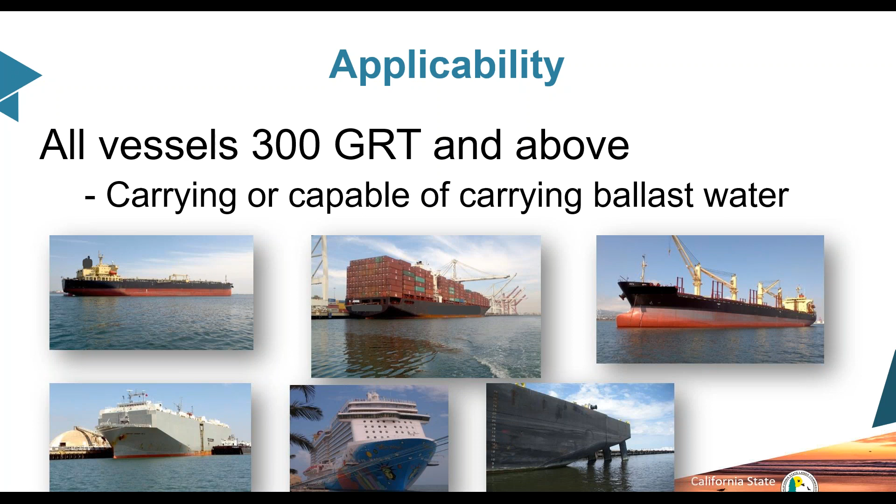So I'll quickly spend just this one slide talking about the main components of the regulations. There's another webinar that we produced about a year ago that goes into more depth for each of these different components, and I'll link to that in a few slides. So if you have any questions or you're unsure about some of the requirements, I'd encourage you to go back to that webinar and review that. And then, of course, please feel free to ask us any questions.

So the main components here are a requirement for a vessel to have a biofouling management plan and a biofouling record book. The biofouling management plan is supposed to be the vessel's management strategy for how they will manage biofouling. The record book is meant to document the implementation of that strategy. And these requirements were important for us because they provided a lot of international consistency. These are major components of the International Maritime Organization's biofouling guidelines that were released in 2011. And they are one of the ways to achieve compliance with New Zealand's craft risk management standard.

There's another component that requires submission of an annual vessel reporting form. This form is to be submitted once per calendar year and at least 24 hours prior to a vessel's first visit to a California port of that calendar year. There are requirements for biofouling management for different wetted surfaces of the vessel, and so there's a requirement for management of the hull and a requirement for management of specific niche areas.

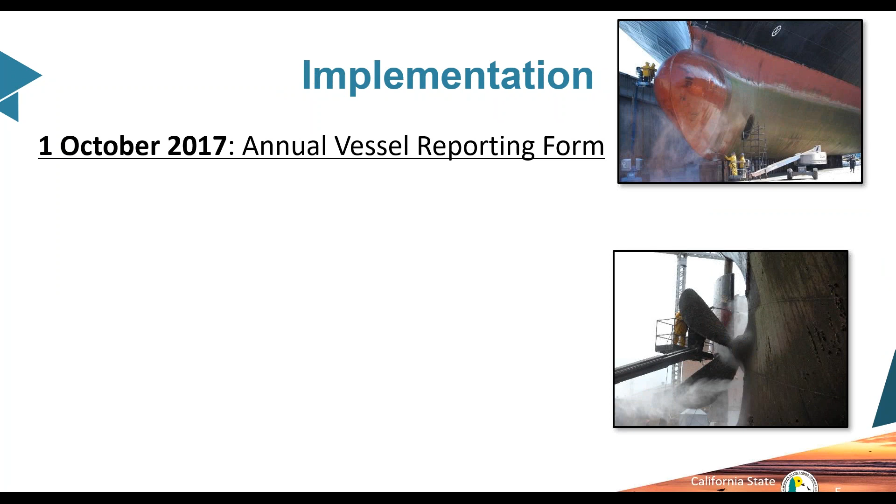So implementation, as I said, the rule went into effect on October 1st, 2017. And at that point, only the submission of the annual vessel reporting form was required. The remainder of the regulations became effective on January 1st of 2018. And they didn't all kick in at the same time. So we phased in the implementation based on a vessel's dry docking schedule.

So an individual vessel is not subject to the remainder of these rules until the completion of their first out-of-water maintenance or dry dock or delivery as a new vessel on or after January 1st of 2018. And we often get the question about why we're phasing it in this way. Basically, effective biofouling management is dependent on a strong biofouling management plan and preventive activities that are best implemented when the vessel goes into dry dock.

I'm not sure why that happened.

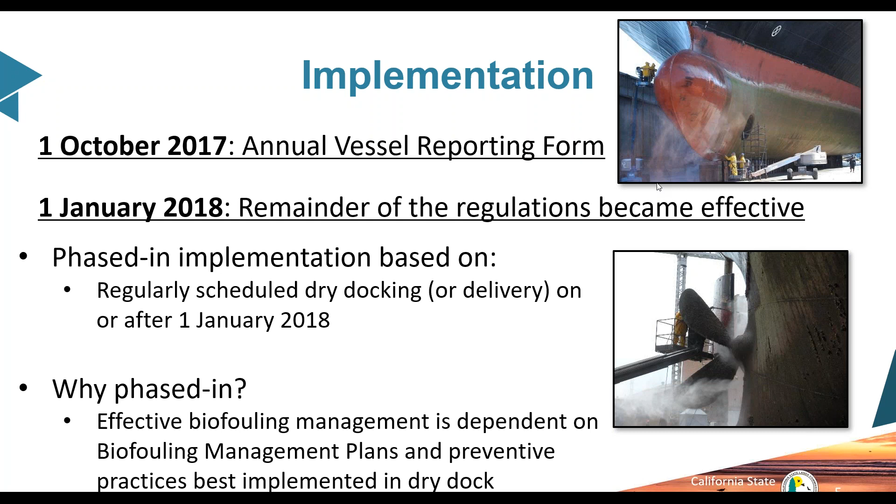And so we thought it was necessary to tie the dry docking schedule into these regulations. So because this was a new set of regulations and regulating biofouling in general was new on the world scene, we knew that there would be a lot of outreach that needed to be done to make sure that everyone was aware of what the requirements were. And so we took a few different strategies of getting information out there.

We developed a guidance document, and the link is right there on the slide here, and the PowerPoint will be posted to our website as well, so you can click on that and get the information. But that guidance document up in the top right corner had a summary of the requirements in the regulations, a section that had frequently asked questions and answers, and an example biofouling management plan to show the industry some of the things that we would be looking for when we conduct inspections.

As I mentioned, we held another webinar about a year ago, in September of 2017. The link is there, and it's also posted on our website. And in this webinar, we describe in more detail the main components of the regulation. And we also held several customer service meetings, one in Southern California and one in Northern California, where we again described the different management requirements within these regulations. And the target there were shipping agents in the Northern and Southern California areas, because the shipping agents are one of the primary conduits of information between us and the industry.

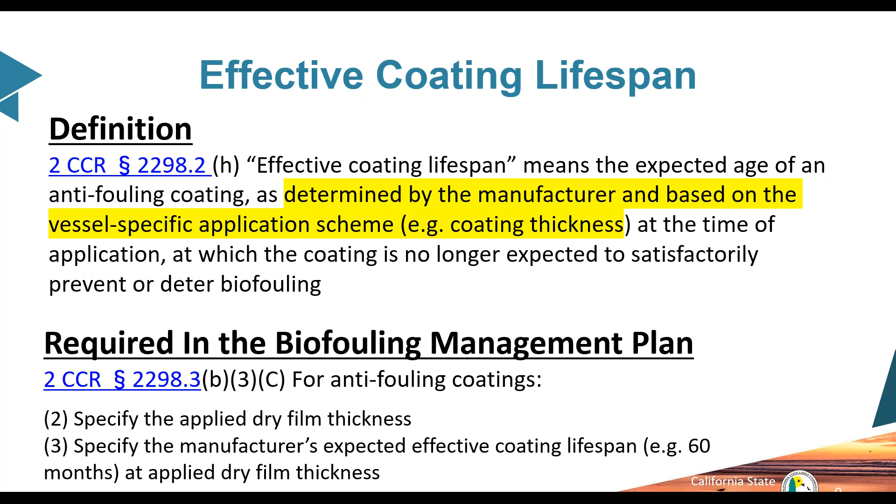The requirement here is within the biofouling management plan, the description of the anti-fouling coating has to specify the applied dry film thickness and specify the manufacturer's expected effective coating lifespan, e.g. 60 months, at the applied dry film thickness. So we're asking them to document the effective coating lifespan of the coating that they're using on that specific vessel.

So the next few slides, we'll go through some examples of some of the useful documents that we've seen through our inspections, and some examples of some incorrect documents that don't specify the information that we need to see. A few examples of these are IMO AFS certificates. These are certificates that are usually distributed by classification societies or flag states, identifying that the vessel is compliant with the IMO convention to prevent the use of harmful anti-fouling coating biocides like tributyltin.

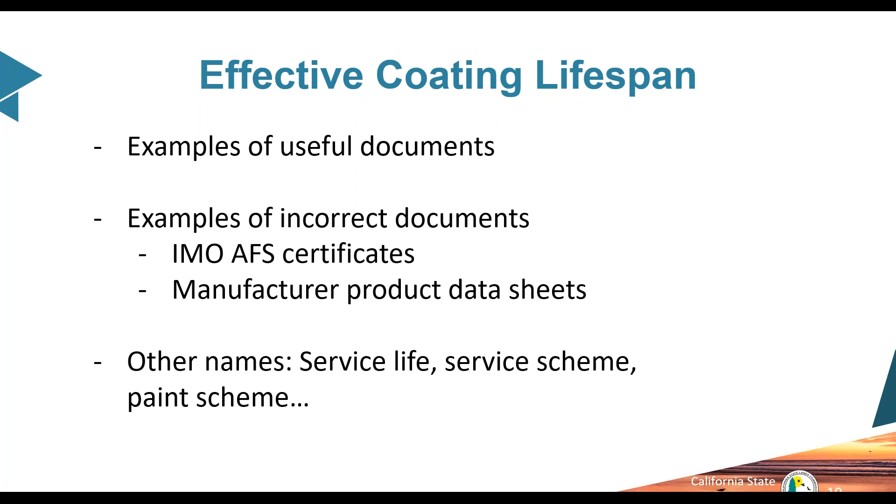Another example of incorrect documents are manufacturer product data sheets that you can get from the manufacturer's websites. We'll show a few examples of those later on. Oh, and a few other names for effective coating lifespan that we've seen are service life of the coating, the service scheme, paint scheme. There's a lot out there, but we'll give you some examples of what we're looking for.

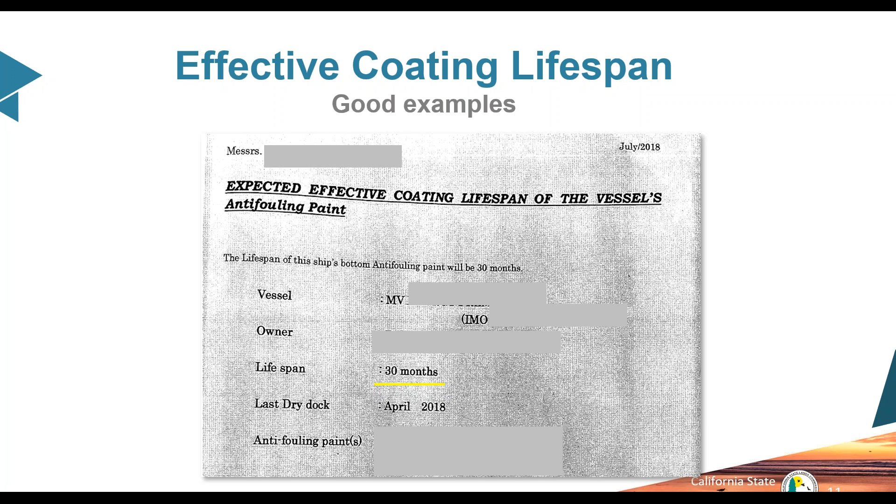So this is a little rough to see. This is a scan, but this is a good example of a document on board the vessel from the manufacturer that tells us the expected effective coating lifespan of the vessel. We've blurred out some of the information that documents the name of the vessel or the products that are being used, but the key point is the part that's underlined in yellow there in the middle. The lifespan of the coating is 30 months, and it's vessel specific because they tell us what the vessel is, and this is coming from the manufacturer, so that's a good sign.

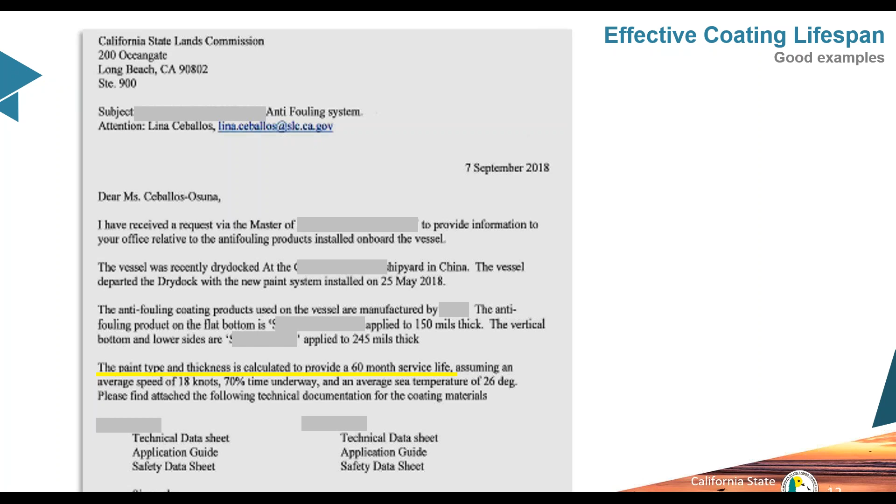This is another example that we've seen after we asked the question and we received this email from one of the companies. Basically, look to the yellow part on the bottom again: the paint type and thickness is calculated to provide a 60-month service life, assuming an average speed of 18 knots, 70% time underway, and an average sea temperature of 26 degrees. So they took into account the vessel's operating profile. The paragraph above discusses the applied dry film thickness, where it says applied to 150 mils thick. So this is a vessel-specific application scheme that's designed for 60 months, and this is coming from the manufacturer.

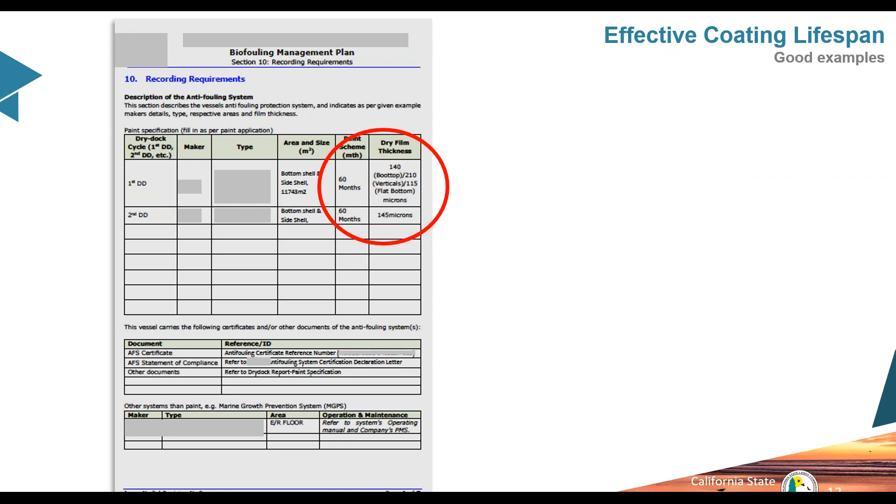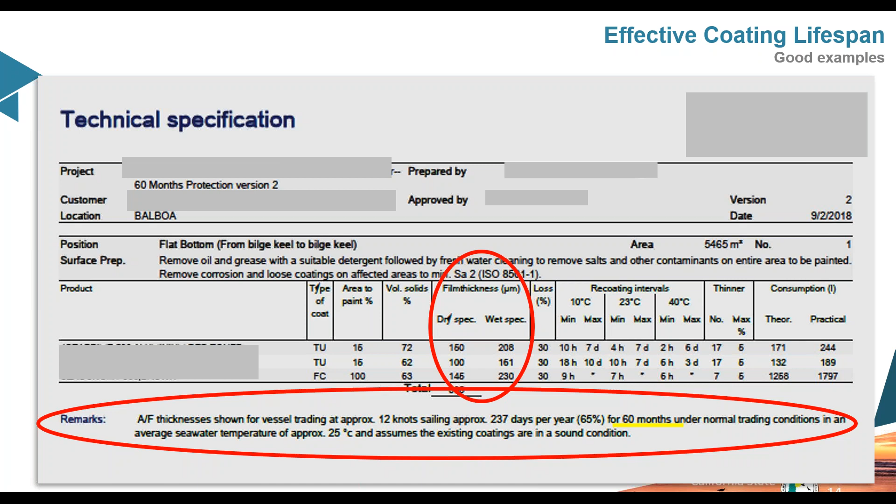Another document that we've seen within a biofouling management plan, again, this is vessel specific. Parts of the areas that we've grayed out document the name of the vessel and the manufacturer of the anti-fouling coating. The part that's circled on the top in the middle is the dry film thickness of the anti-fouling coating. And then the remark at the bottom states the anti-fouling thickness is shown for vessel trading at approximately 12 knots, sailing approximately 237 days per year for 60 months under normal trading conditions. So this is stating that it's a 60-month coating based on the vessel's operational profile and based on the application scheme.

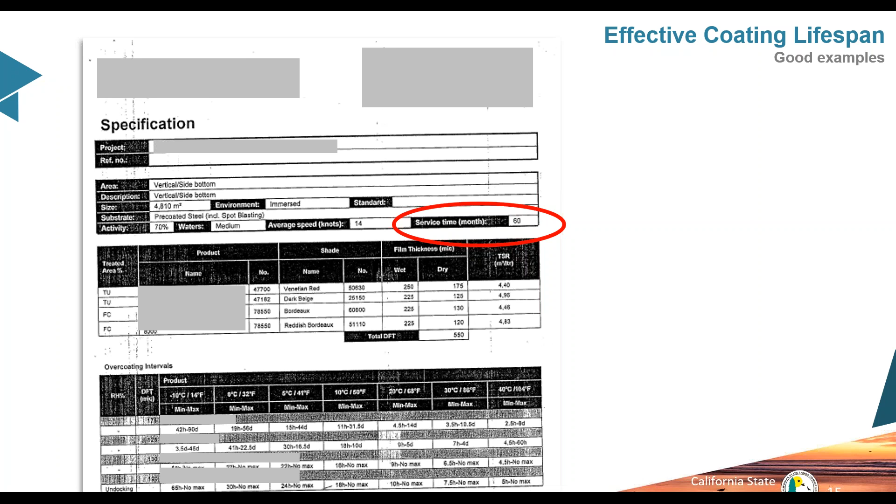I think this might be the last example, a good example. This again is coming from a manufacturer, documenting the name of the ship, the type of painting, the name of the product, and the service life of the product at 60 months for anti-fouling performance.

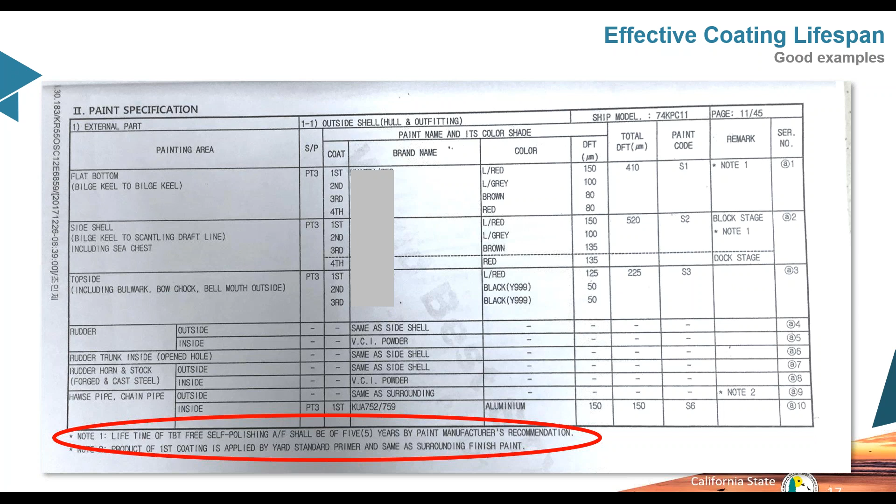One more. Again, just another example, different areas of the vessel that the paints are being applied to. In the middle of the table there, you see DFT, that's dry film thickness. And then the bottom shows lifetime of TBT-free self-polishing anti-fouling shall be 5 years by paint manufacturer's recommendation. Again, all of these are good examples of documents that show what the manufacturer recommends as an effective coating lifespan.

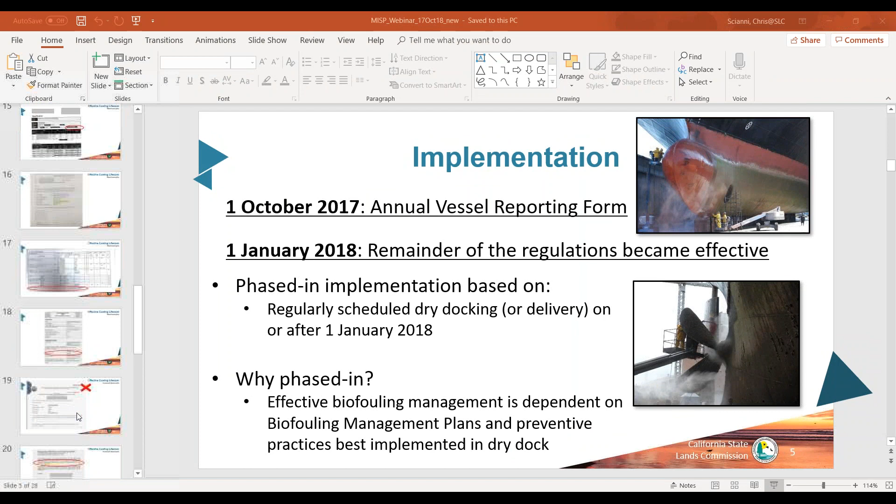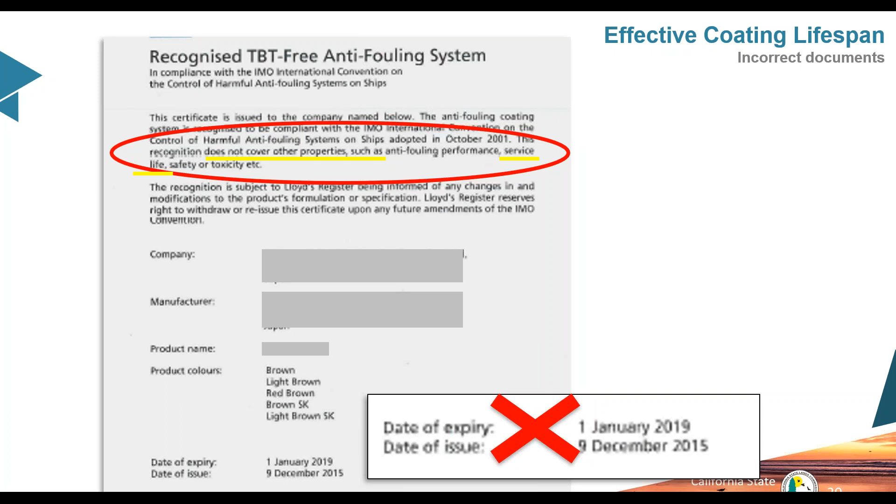Or service life. So they're stating on this form that this is not an indicator of service life. Even though at the bottom of this they have an expiration date, this is an expiration date for this certification that the coating does not have tributyl tin in it. And it's coming from the classification society and not the manufacturer.

So the other area where we've seen a lot of confusion is around the requirement that the vessel or the biofouling management plan document how certain niche areas will be managed. And the one that's been problematic is the requirement to manage out-of-water support strips. And so we'll give you a few definitions here and a few examples on the slides coming up.

But in the regulation, out-of-water support strips means sections of a vessel's hull that rest on the out-of-water support blocks while the vessel is undergoing out-of-water maintenance in a dry dock or slipway. These areas are typically not cleaned or treated with fresh anti-fouling systems, resulting in reduced anti-fouling protection. So these are areas of the vessel's hull that rest on support blocks.

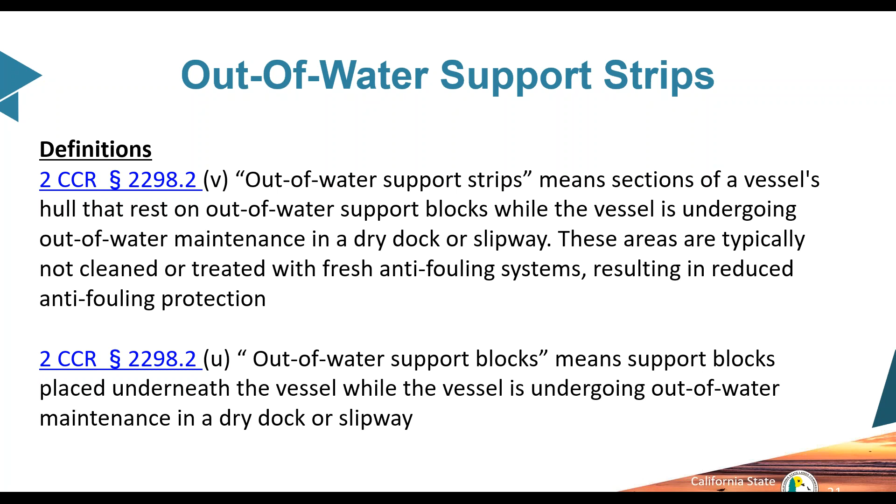The definition on the bottom is out-of-water support blocks, which means support blocks placed underneath the vessel while the vessel is undergoing out-of-water maintenance in a dry dock or slipway. And so when the vessel goes into dry dock, it sits on out-of-water support blocks, which are physical structures that are not a part of the vessel. The out-of-water support strips are the parts of the hull that are sitting on those blocks. So we'll show some examples here.

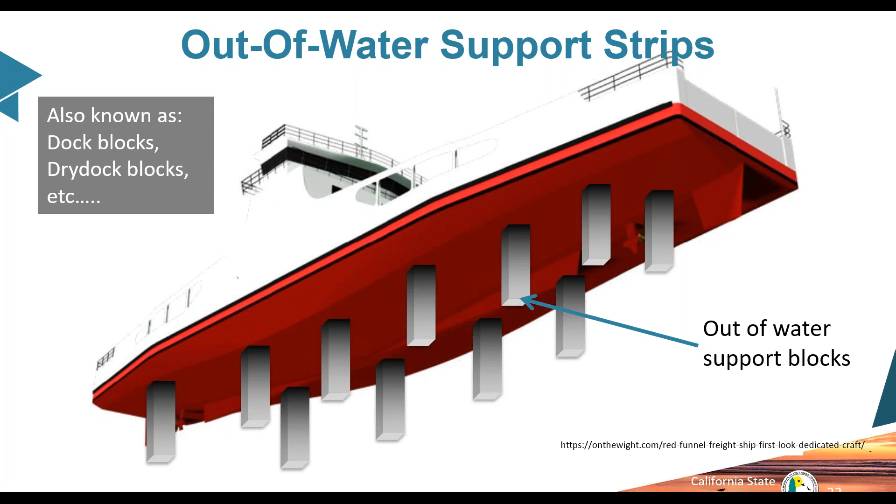So in this hypothetical vessel with these out-of-water support blocks underneath it, it's in a dry dock, the water has been drained, and the vessel is resting on these blocks. And if you see on the left side, these are also known as dock blocks or dry dock blocks and a few other names. So underneath those dry dock support blocks, out-of-water support blocks, are strips of the hull that when the hull is cleaned and painted, these strips are not cleaned and painted because they're sitting underneath those blocks.

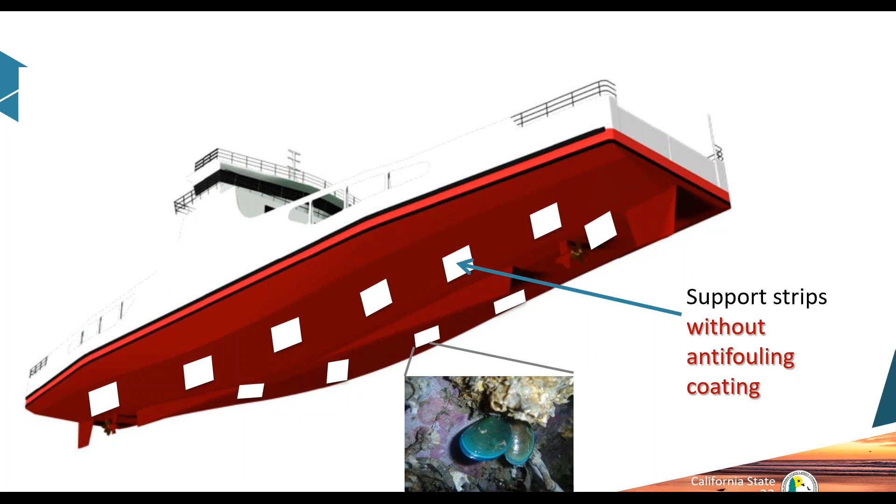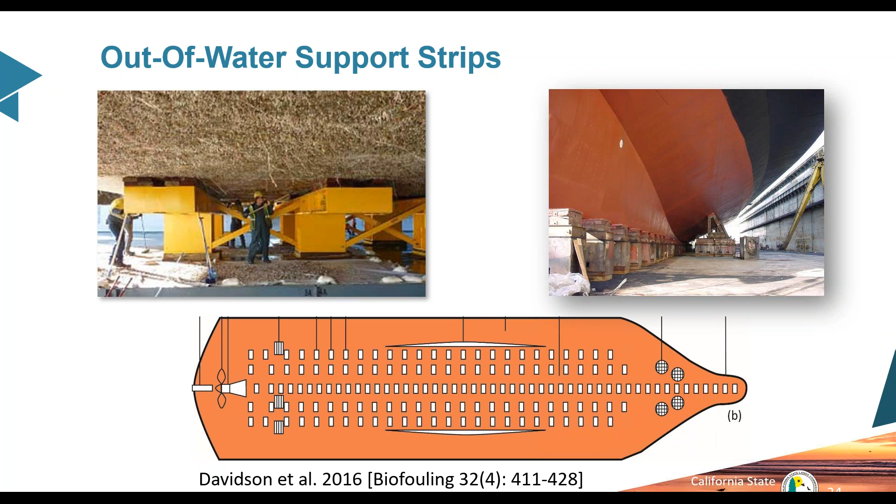And then when the vessel goes back into service, those areas that are represented by the white rectangles have no anti-fouling protection at all. And so they become hotspots for biofouling accumulation. And so the requirement is to describe how those areas are being managed, not necessarily how the flat bottom of the hull is being managed, but specifically how the out-of-water support strips are being managed.

And this picture just shows us a good example of, again, some out-of-water support blocks, and then the vessel resting on top of it. And that big cluster of organisms that you see is contained within an out-of-water support strip from the vessel's previous dry docking. You can see it better with different angles, but the area of the hull with the cluster of organisms is a different color than the rest of the vessel, because that area during the previous dry docking was not treated with anti-fouling coating.

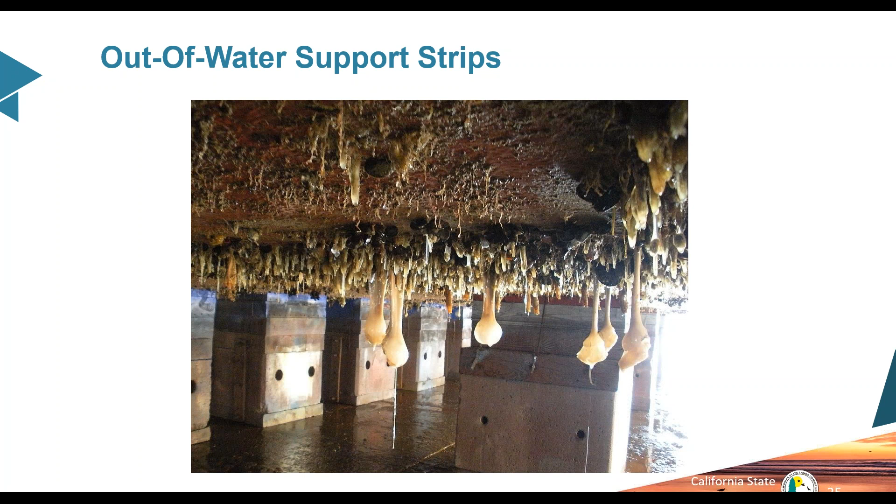And so during this dry docking, the vessel owner or operator moved the blocks around so that the areas that were previously out-of-water support strips can be managed during this dry docking. And so this is one way for these areas to be managed, is to move the location of the out-of-water support blocks the next time the vessel goes into the dry dock. So those are the two main areas where we've seen a little bit of confusion, and we believe could be improved with a little bit of clarity through this webinar.

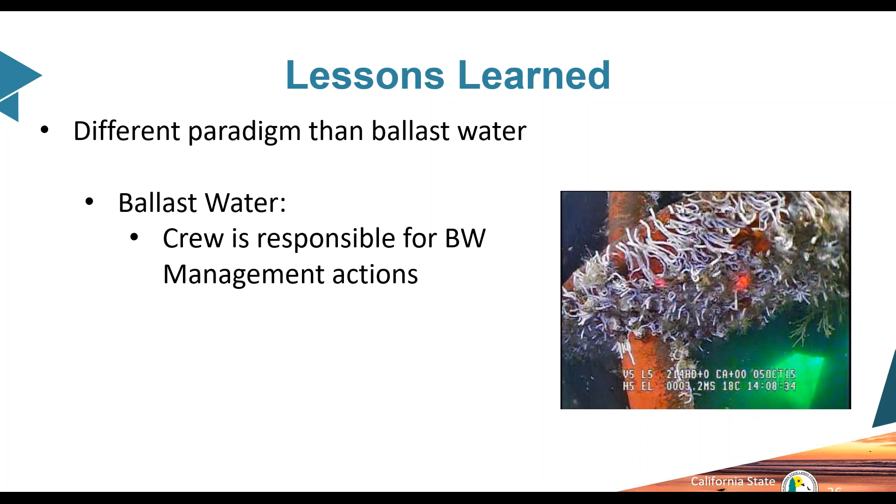And I'll just close this section by talking about some of the lessons learned over the last year. Basically, we're dealing with a different paradigm than with ballast water. With ballast water, the crew is responsible for the ballast water management actions. So when one of our marine safety specialists goes on board, conducts a ballast water inspection and finds a deficiency, for example, the ballast water exchange was conducted in the wrong location, or not conducted at all, or the ballast water treatment wasn't conducted properly, that's usually something the crew is responsible for, because they're the ones carrying out that action.

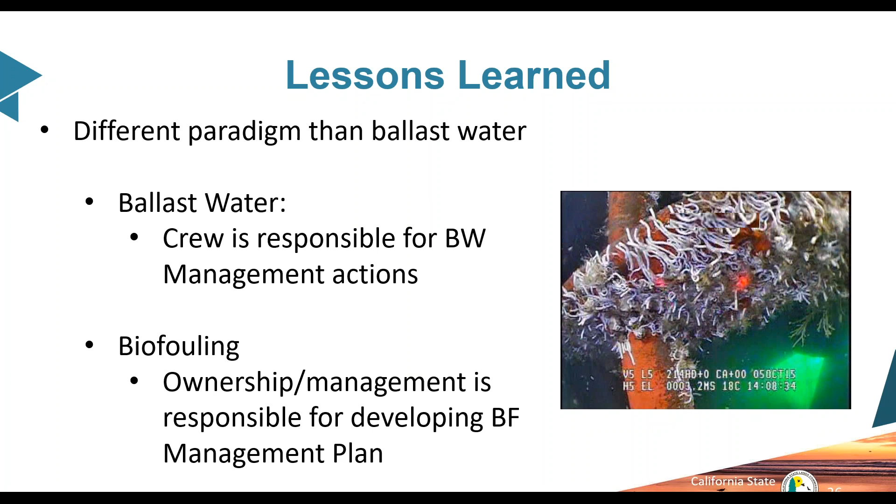Whereas with biofouling, we're looking at preventive activities and biofouling management plans that are developed prior to a vessel going into dry dock. And so the crew is not involved at that time. The ownership and the management is responsible for developing these management plans. And oftentimes when our marine safety specialists go on board and conduct inspections, whatever deficiencies we find are usually not correctable on board the vessel. And so we've been advising the crews to elevate it to their ownership and management, because these are areas that need to be addressed at a higher level.